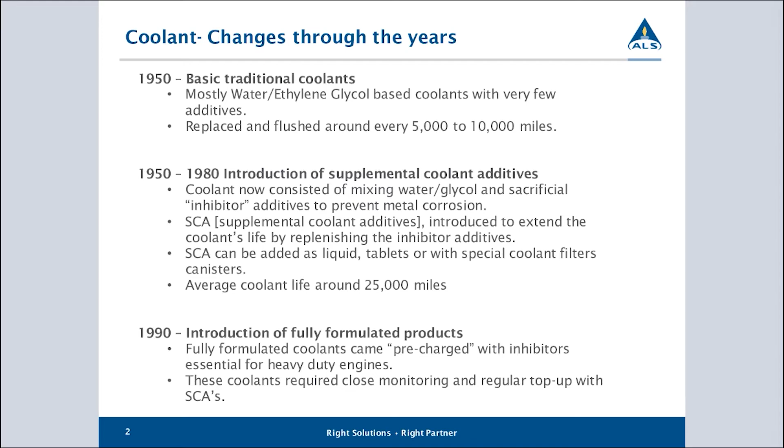Around the mid-90s, we started to see a completely new technology coming into the coolant space, normally referred to as extended or long-life coolants. These were coolants meant to be a fill-for-life type coolant, where instead of needing to be re-additized at intervals, it could essentially be put in the system and left to work continuously, typically for the life of the system.

The principle these coolants worked on is that instead of using a sacrificial additive or inhibitor, they used a barrier technology. Essentially, the additives in these coolants, normally some form of organic acid, would coat on the metal and prevent oxygen from being able to penetrate the layer and come into contact with the surface, and this would then stop corrosion from taking place.

There was a lot of interest in these coolants when they first arrived, because there's a lot of hassle in looking after cooling systems, and this certainly took away a lot of the hassle factor.

However, these coolants didn't seem to work out as well as expected. We found corrosion was still occurring in engines using these coolants, and in some cases you would even have accelerated corrosion, more serious than what we had seen on the conventional coolants.

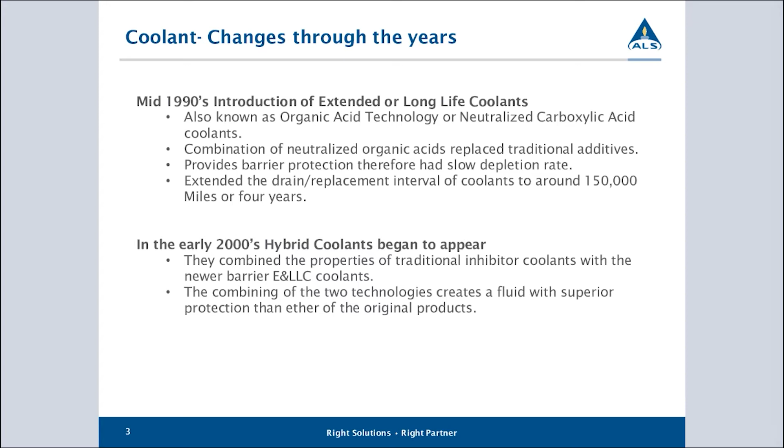All right, moving into a little bit more detail on the coolant formulations.

Coolant generally starts with water. Water is still one of the most popular means of providing coolant, because water is very good at transferring heat. Its ability to absorb heat energy and to move it through a system and dissipate it through a cooler is very effective compared to a lot of other fluids. This is why it is still a very popular coolant type that we see being used in engines and even increasingly with EV vehicles.

The batteries and the charging systems also need to be cooled, and we're seeing the same sort of thing happening where they're using water-based coolants to provide this cooling on those vehicles. So we start with water.

Excuse me a minute, just to keep the throat working. So we start with water, and then we will mix it with glycol.

Historically, ethylene glycol was the main glycol used. Increasingly, we're seeing propylene glycol being used now. Essentially, both of these are to try and provide freeze protection for cold environments in winter, and also some assistance in boil protection to try and raise the boiling point of the fluid.

The general ratio of water to glycol is generally 50-50. Nearly all coolants will be prepared at that dosage rate. We will then add our inhibitor package. So if it's a conventional coolant, we'll be using our sacrificial additives. If it's an organic acid, it will be using the organic acid inhibitors, or a combination of both. Increasingly, we're seeing these hybrid coolants becoming the dominant coolant type that we see being used now.

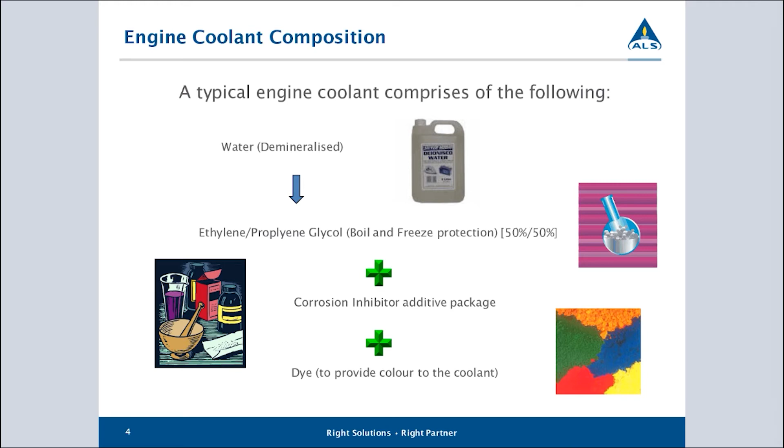And then lastly, we put a dye into the coolant, and this is just purely to give it an identifiable color. There is a range of different colors that coolants can be dyed, but the dye itself doesn't provide any benefit to the coolant. It's just merely a means of being able to give it a specific color so that we can identify it.

Just through convention, there's no real rules about this, but what we tend to see happening is that conventional coolants are generally dyed green, and that's probably the most popular color for a conventional style coolant. They can also be purple, blue, pink. Those are typically the colors that we're seeing conventional coolants being dyed.

The hybrid or long life coolants are typically red, which is a very popular color. Orange is a popular color. Yellow and blue are also popular, more in the European market than in North America.

Something else that can be done with the dye is that there are some coolants where you get a color change that can be triggered by the dosage rate. So you can get a sense of whether or not your additives and your water is in the correct ratio based on the color. There's a color change if there's too much water or not enough water in the coolant.

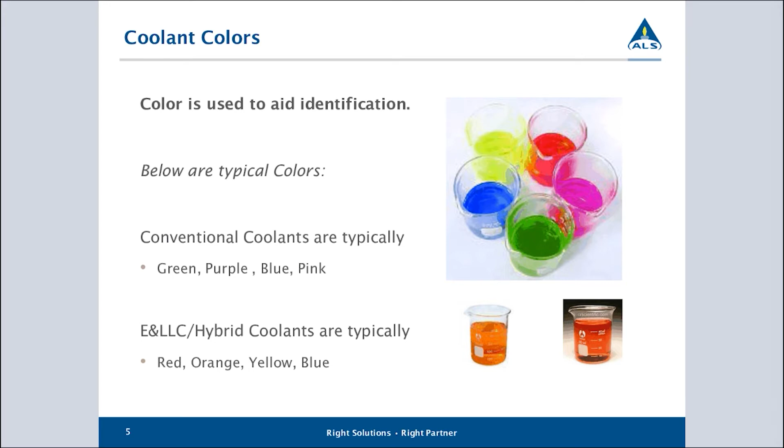Some of the coolants will also contain a phosphorescent dye that makes it easier to identify coolant leaks. So if you've got coolant leaking out of a system, the coolant may boil away, but it'll leave some of the dye behind. And these can be spotted using black light, that type of thing.

Conventional coolants have a wide range of additives that can be present in them, and normally there'll be more than one. Sodium nitrites is probably the most common inhibitor we're seeing in use in conventional coolants. These are very effective at preventing corrosion on iron. But sodium nitrites doesn't work very well with aluminium systems.

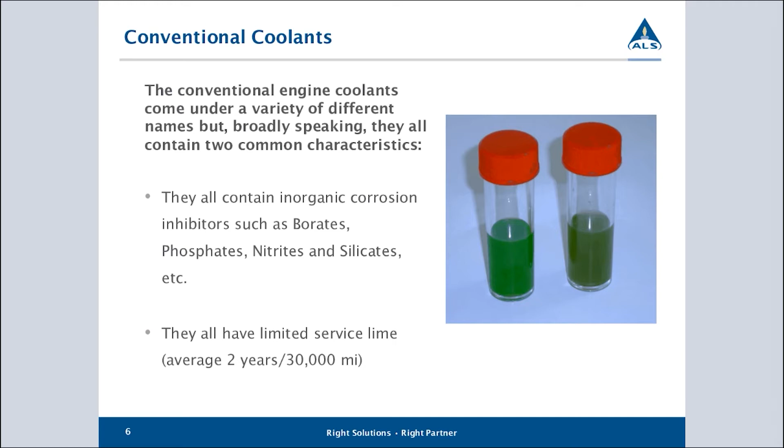So if you have got aluminium, you tend to find silicates is more common in the conventional coolant space. So sodium nitrite, as I said, is the most common, and monitoring nitrite depletion in a coolant is a very essential part of monitoring the life of these coolants and making sure that they still work effectively.

Essentially, what's going on for people unfamiliar with this is that you will dose the coolant with sodium nitrite. When nitrite reacts with oxygen and becomes nitrate, that basically means it's got an extra oxygen added to the molecule, and we're monitoring the conversion. Once it becomes nitrate, it's no longer effective in the system. So by monitoring both compounds, we can see the conversion rate from one to the other.

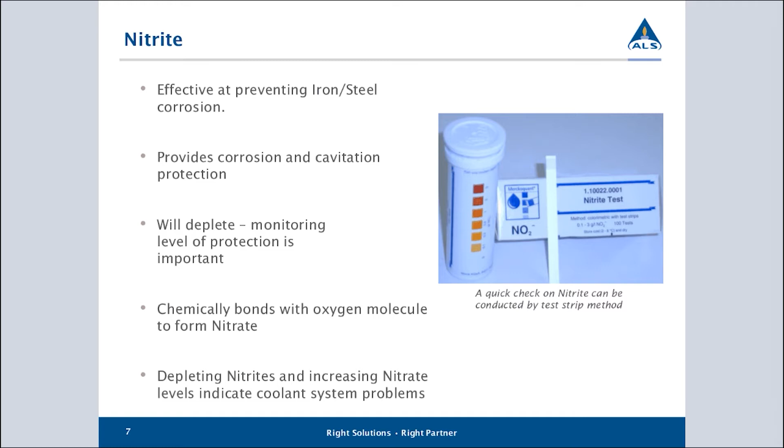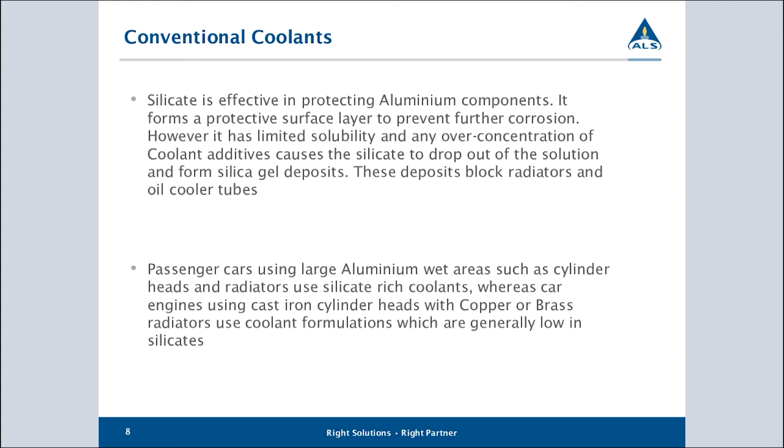If you have an engine that is primarily aluminium rather than cast iron, then sodium nitrite doesn't work very well, and so these tend to use a silicate inhibitor. You tend to find that these have fairly high levels of silicon in the silicates in the coolant to prevent corrosion. There are problems with using silicate-based coolants. I'll get into those in a little bit more detail in the next few slides.

Your extended life or long life coolants will often advertise the fact, or be easily identified by the fact, that they do not contain silicates, phosphates, or borates. The reason they're advertising this is that the presence of these additives can form solids in the coolant.

This is the problem I was referring to earlier when I was saying that people were overdosing the coolant. If you have too much additive present, it will tend to crystallize and form hard deposits. These can be abrasive and they can also block the system, so the formation of these compounds is not desirable in a cooling system. Anybody working with cooling systems for any length of time would have come across a cooling system that's full of a green gungy type of material, and that's the silicates forming or crystallizing within the system.

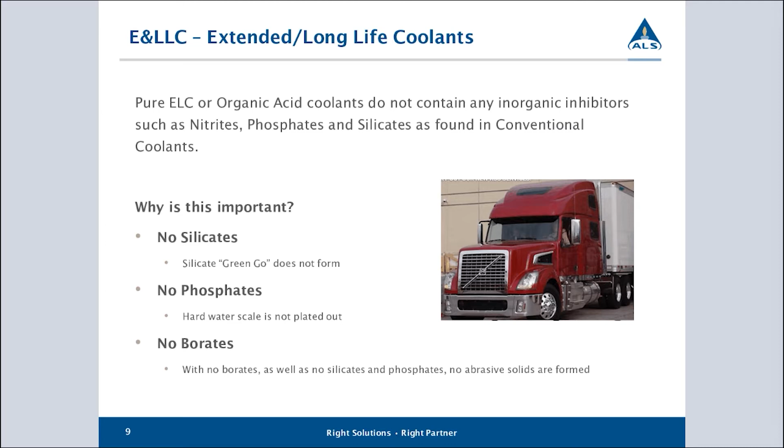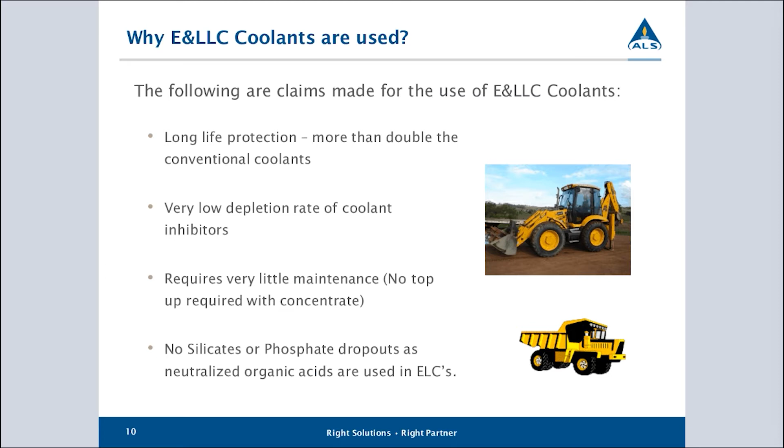So, as I said earlier, the main reason people tend to promote the use of these coolants is the fact that it can be a hassle-free coolant. You put it in, you don't need to worry about it again.

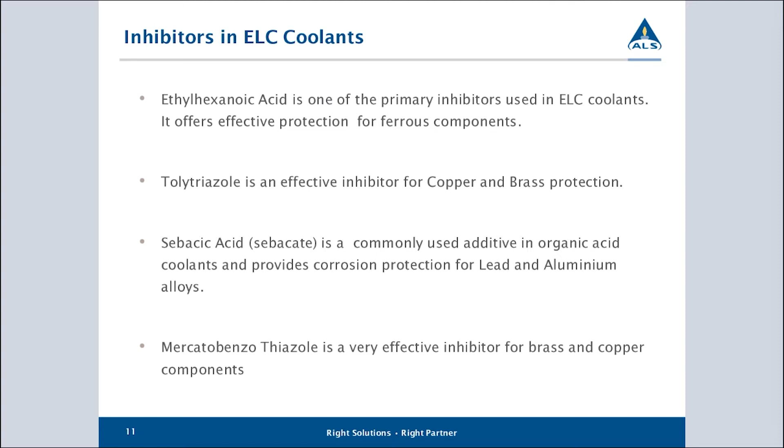Can we mix a coolant? The simple answer to this is no. We really shouldn't mix two different coolants together unless we properly understand what it is that we're dealing with and what the chemistries are that we are working with. So as a general rule, I strongly recommend that we do not mix coolants unless it is an emergency situation, where we have no choice but to keep a system running and have to put in a different coolant. When that occurs, I recommend that at the earliest opportunity we need to drain what is in the cooling system and refill with whatever is the main coolant you would typically use in the system, just to get that mixture out of there.

The problem is that because different coolant manufacturers use quite different chemistries in their coolant, when we start mixing these together, we can get reactions between these additives, and these reactions can be unpredictable unless we properly understand the formulation of each of the coolants. So the general advice is not to mix coolants if at all possible.

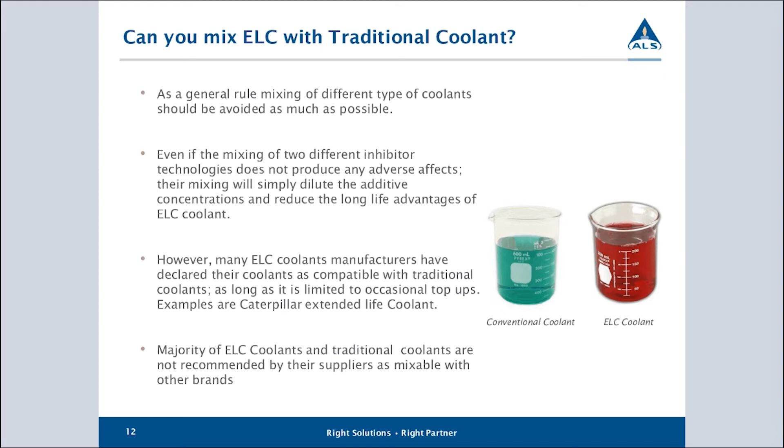The hybrid coolants are literally a mixture of organic acids and one or more of the sacrificial type inhibitor additives, and the most common one you will find in there is sodium nitrite. This is particularly common if the coolant is intended to be used on an engine that's got cast iron cylinder heads and cast iron blocks.

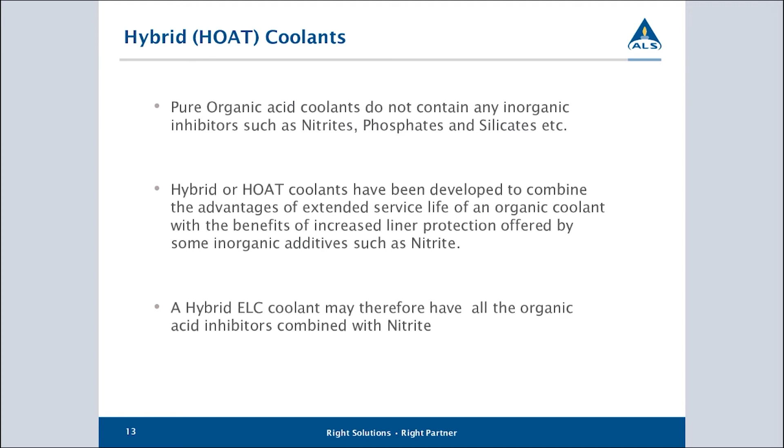There are other inhibitors that will be used if we're dealing principally with aluminium components. Sodium nitrite is not very good at protecting aluminium, particularly at higher concentrations - it can become problematic to the system, which suggests that we need to be careful as to what coolant we're using in what system, to make sure that they are compatible with each other.

Something to bear in mind is that one of the common threads we see occurring with engine technology in particular is the drive to make more power from less. Basically, engines are tending to get smaller, and power is tending to get larger, and this ultimately means that to generate more power, we need more heat. So we've got systems that are getting hotter, producing or capable of producing a lot more heat to produce the power output that we want. And that means the cooling systems are having to deal with higher heat loads, particularly under peak load conditions, than what they may have been dealing with historically.

Sorry, I have to keep taking a sip of water to try and keep the throat working.

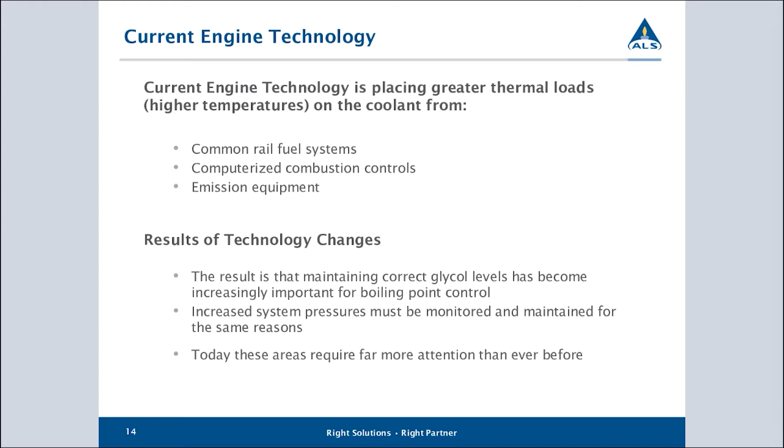A number of research bodies have looked into what causes failures on engines, and most of these conclude that nearly half of engine failures can be attributed back to the coolant. In my personal experience, I've seen it rated even higher than that. Often we'll have an engine that has failed, possibly a bearing failure for example, but when we strip the engine down and examine it, we'll tend to find there was in fact a corrosive problem in the cooling system that allowed coolant to leak into the engine oil, which had ultimately caused the bearing failure. So the origin of the failure was through a poorly maintained cooling system.

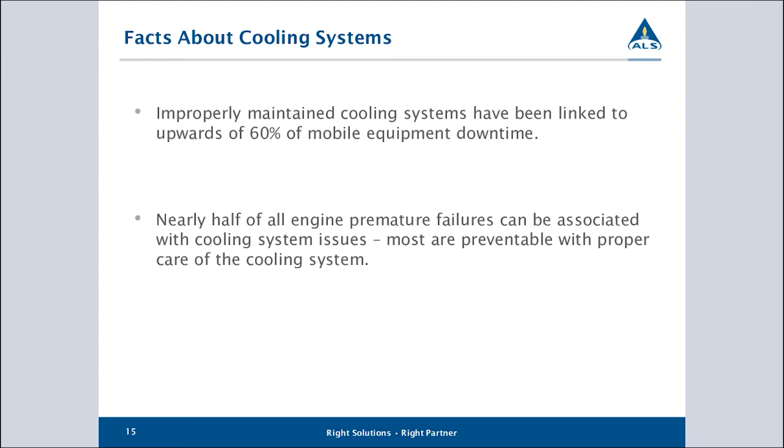Moving on to the testing that we do, there's a range of physical tests that we can do to the coolant to understand its physical condition. In no particular order of importance, we've got pH, reserve alkalinity, glycol content, chloride content, nitrite content, conductivity, and quantifying the organic acids present in the coolant. We can also look for contaminants in the cooling system to see anything that might be getting in there that shouldn't be.

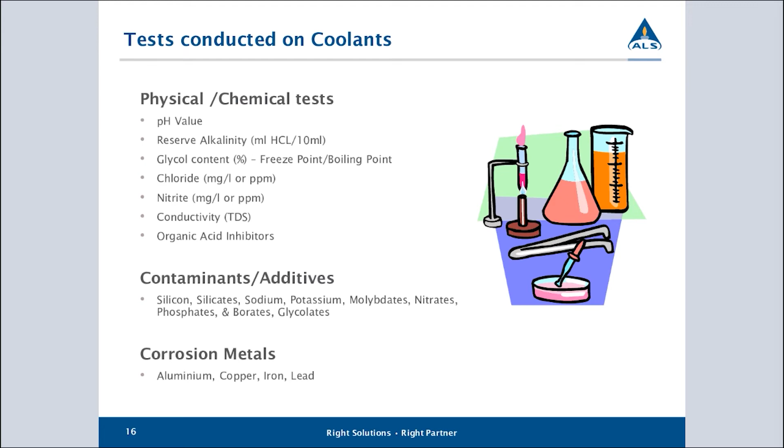And then importantly is to monitor corrosion. If we can monitor the metals present in the system, and if we see those metals starting to dissolve into the coolant, that is a strong indicator that corrosion is occurring within the system.

All right, pH. Water that we start with has a pH of 7. We put additives into this coolant, and generally those additives tend to be more alkaline. So what we see is that the overall pH value of a coolant tends to rise above 7, to somewhere around 8. Most new coolants, when we test the pH, will test somewhere around 8 on the pH scale, and it should be stable.

The most important thing to be aware of with your pH value is that you want it to run somewhere between 7 to 8, possibly as high as 8.5, but you don't want it to go much higher than that, and certainly not much lower. It should also remain very stable. If you keep checking the pH over an extended time frame, whatever its original value was, that's what you want it to stay at. If you see changes in pH, it's indicative of something happening to the system—that could be contamination or degradation of the coolant, or a combination of those things. As soon as we see shifts in the pH value, that's a very early warning indicator that this coolant is not working very well in this environment.

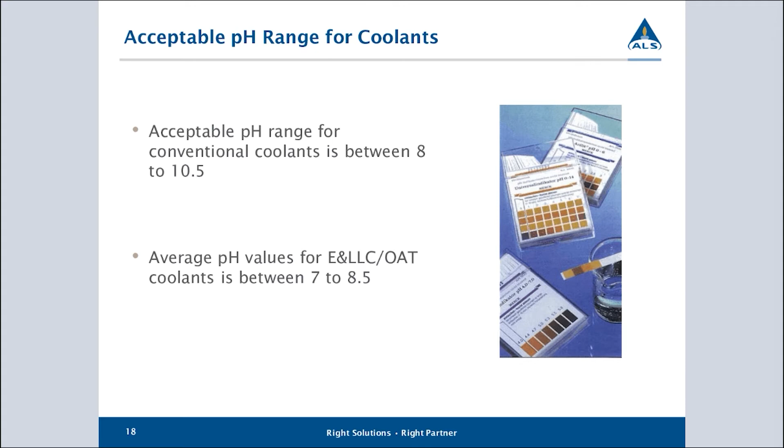For our conventional coolants, the older style coolants, somewhere between 8 to 10 would be a typical range. You very seldom see them as high as 10 nowadays—all the newer formulations tend to run between 8 to 9 maximum, and it's unusual to see a coolant go up to 10 now. For your longer life or hybrid coolants, generally they're running between 7 to 8.5, more typically around 8 would be a typical value. Ideally, whatever its starting value is, it should remain at that value. We don't want to see changes in the coolant over time.

A very common measure done on cooling systems is to quantify the sodium nitrites, because this is your principal inhibitor additive used in most coolants. Any heavy-duty coolant will invariably have sodium nitrite as part of its chemistry. It's just very effective at preventing corrosion of cast iron or steel components in the cooling system.

As this additive gets consumed, we will see a drop-off in the nitrite value, and if you're monitoring the nitrites, you'll see this change in quantification. So it's really good to see how the inhibitor is being used. If you see a rapid depletion, it means something is trying to drive a lot of corrosion in your cooling system, and this means two things: you may have a problem with the cooling system running too hot or overstressed, or it could mean that whatever else is in that coolant that should be inhibiting corrosion is not working. If this is a hybrid style coolant, it means the organic acids are not doing their job. This could be through cavitation, excessive vibration, or electrical current. There's a range of things that can cause this, but it's an early warning indicator that this coolant is not surviving very well in that environment.

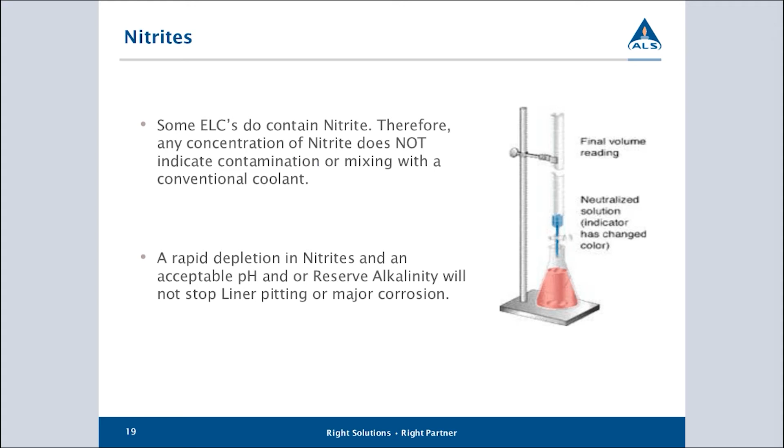We measure the organic acids principally by using ion chromatography or ultra-high pressure liquid chromatography. These are complex instruments—laboratory-grade equipment. It's not something easily used in the field environment, but it can quantify, and particularly important for coolant monitoring, it can quantify the organic acids for us. This enables us to see things like, is there a mixture of coolants being put into use? Are these additives being removed from the coolant? This would indicate that there's some sort of stress going on in the coolant. So it gives us a snapshot into that aspect of the physical property of the coolants.

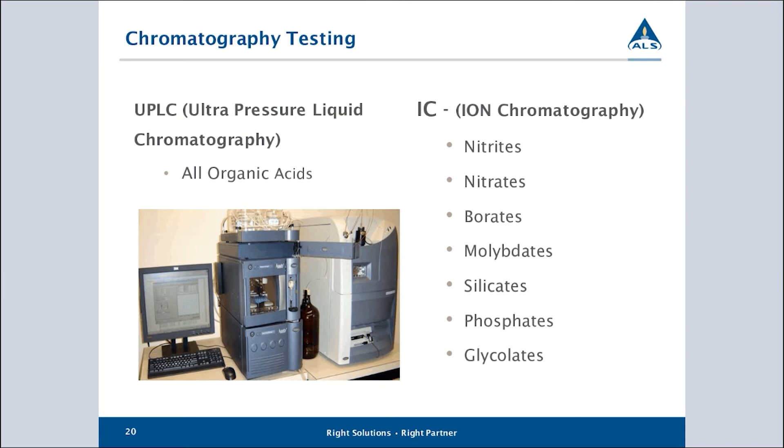We do an elemental analysis mainly for the metals, and we can also look at some of the additive chemistry directly. The main elements we're monitoring are things like aluminium, iron, copper, and lead. These are the metals most commonly found in cooling systems. If we see an increase in any of these elements, it's an indication that corrosion is taking place in the system. So even if all the other properties look good on the coolant, if these are increasing, we have corrosion—there is something causing corrosion within our cooling system.

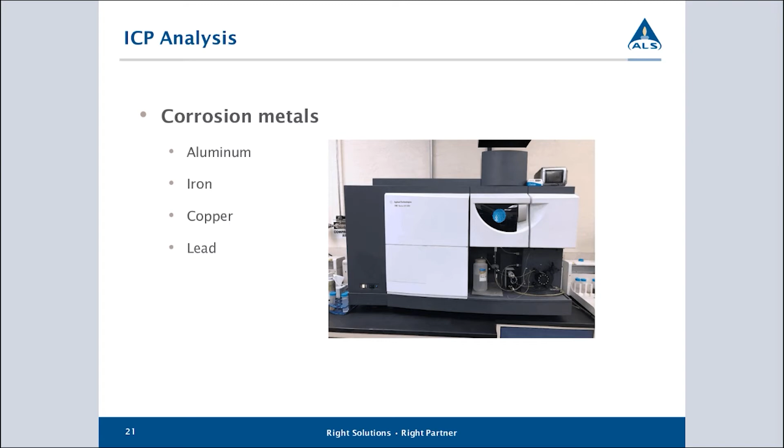Reserve alkalinity is a measure of the coolant's ability to absorb acid. Coolants don't normally get exposed to much acid from the environment, that type of thing. But there is one potential problem with the coolant, and that is your glycol: when it degrades, glycol can thermally decompose, and it will start doing this as low as sort of 80 degrees Celsius. When this thermal degradation occurs with glycol, it does tend to produce acid components.

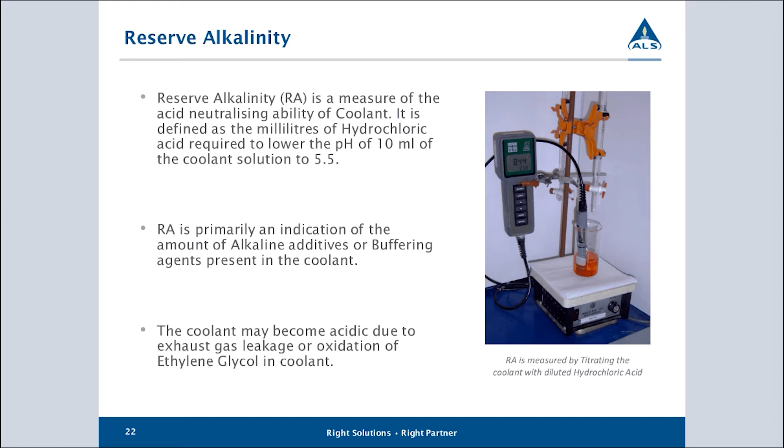So with some coolants, we know that we're going to see thermal degradation of the glycol. We know that acid is going to be formed, so we need to buffer the coolant to absorb that acid, to prevent it causing any sort of acid corrosion in the system. The reserve alkalinity is a means of measuring that buffering potential. And how much buffering the coolant can take depends very much on the chemistry that the formulators put into it.

So we do see a range of potential values that could be reported. Conventional coolants generally have higher RA than the newer hybrid or long life coolants, but essentially what you see on screen, 8 mils to 20 mils would be typical for an older style conventional coolant. 2.5 to 5 mils will be what you would see for the newer style coolants.

In of themselves, it's just telling us what the coolant's ability is to absorb acid. It doesn't necessarily tell us the coolant's ability to stop corrosion. So you may still have very acceptable reserve alkalinity of a coolant, but if the inhibitor additive, say sodium nitrite, has been consumed, corrosion will still happen. The RA itself will not inhibit corrosion in the system.

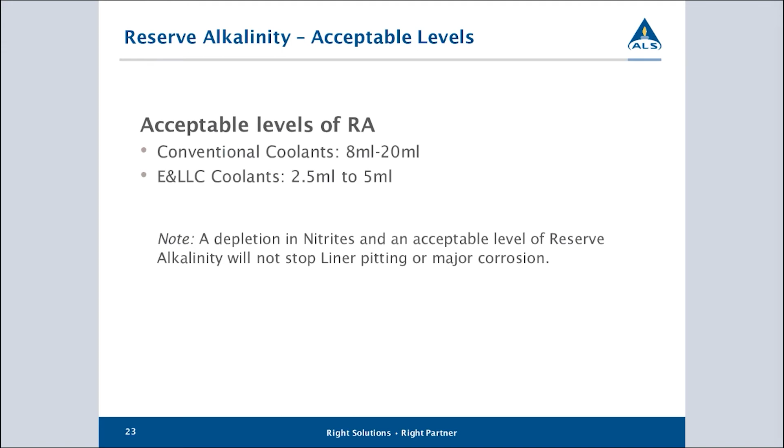Conductivity is something that's fairly quick and easy to measure on the coolant. And the reason we measure it is that the chemistry in the coolant is going to provide a certain level of conductivity in the coolant. Generally, pure demineralized water is a very poor conductor—electricity just simply won't flow through it easily. As we start adding things to the water, the conductance increases.

So the first thing we need to establish is, all right, we've got a new coolant—what is the typical conductivity of this coolant? Then we look for changes. And if we see changes, generally increasing conductivity in the coolant, that could be through contamination of the system. A very common cause of this is contaminated water being added to the system. So if somebody's just drawing tap water and adding it to the system, that will definitely drive up the conductivity. That's a very quick way of identifying that particular problem occurring in the coolant.

It can also change as chemistry changes. So again, it's another easy way to tell that some sort of chemistry in the coolant is changing, and this could be a precursor to bigger problems in the cooling system.

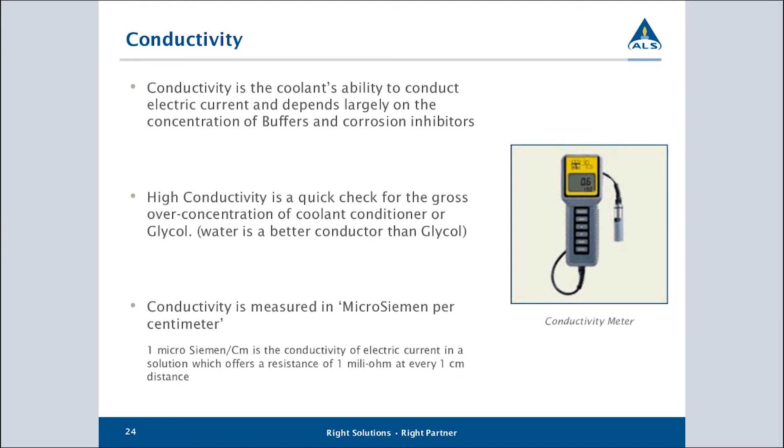Total dissolved solids is a measure of how much solid content is being carried around by the coolant. The principal way to do this is to filter out the solid particles and then weigh how much solid material is filtered from the coolant. You can also do it by using what they call a TDS meter—a version of a conductivity meter that measures conductivity and then converts it to a total dissolved solid content number.

Be aware that this number doesn't correlate very well to an actual filtration methodology, and that's just inherent within the formulation of the coolant—it does tend to interfere with the measurement. But at least if you trend it, you can get a sense of if this is going up or down. Obviously, having solids in your coolant is not desirable. It'll wear moving components like your water pump, and it can also start to block narrow tubes and pathways, etc.

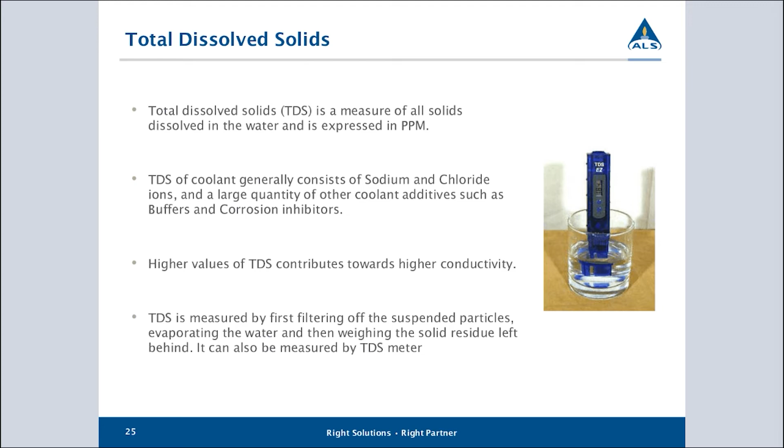Measure of hardness is basically just measuring your calcium carbonates or other carbonates in the water. These are found if people are using tap water or drinking water, you'll tend to have these present. They're important for human health, you don't want to drink water that doesn't have these, but they're not beneficial to a cooling system and can lead to deposits. That's our main concern with calcium carbonate or any of the other carbonates, is that it will deposit in the system.

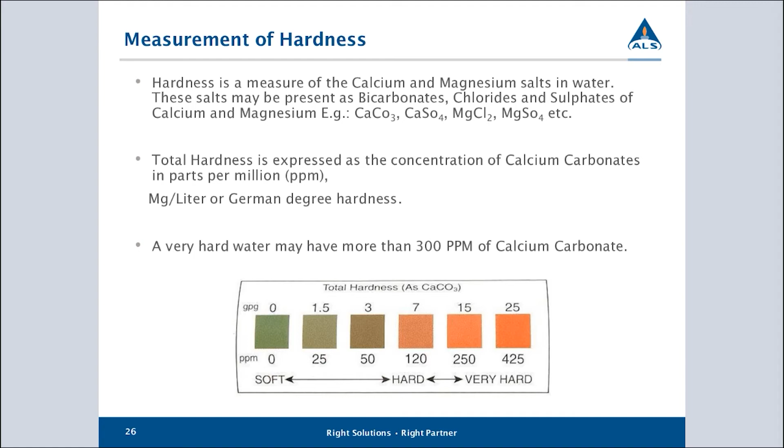But unfortunately, when they're in the cooling system, they will tend to be deposited out, and there's two problems. First, it's reducing the flow because it's taking up space. Second, it's also very good at insulating and doesn't allow easy heat transfer through the surface, so it inhibits the ability for heat to be managed in that system.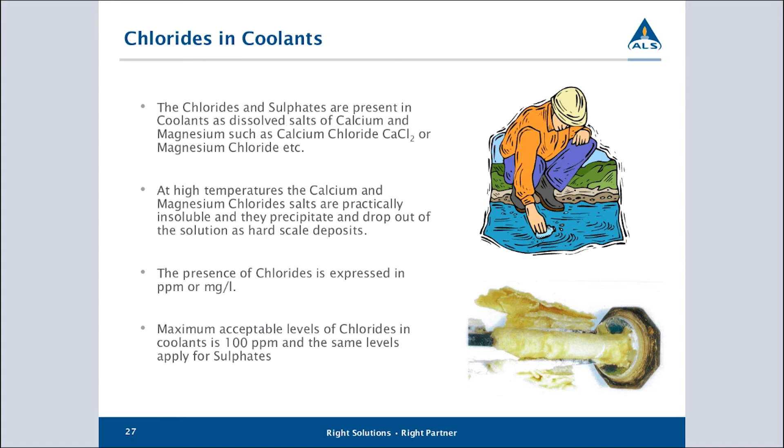Different engines and engine manufacturers have different levels of what they believe is acceptable for this, so we've got a couple on screen there. Some engines are more sensitive to it than others, so it depends on the design of the cooling system and radiator system as to how much it can tolerate. But as a general rule, you want to reduce your hardness as much as possible and have as little dissolved solids content in your coolant as possible, which means we have to use high purity water when making up or topping up a coolant system.

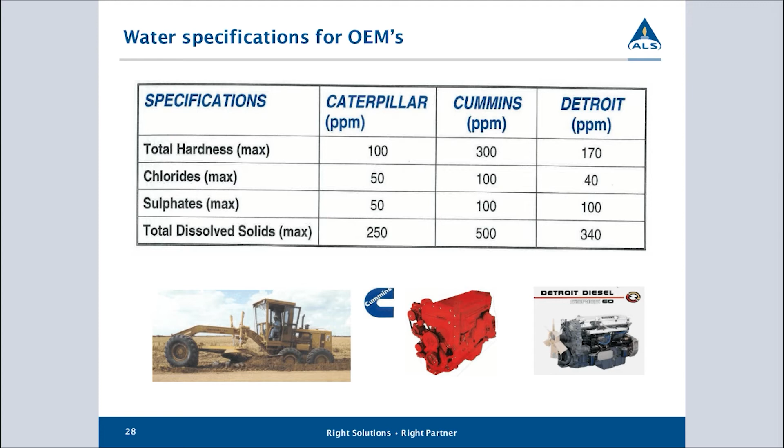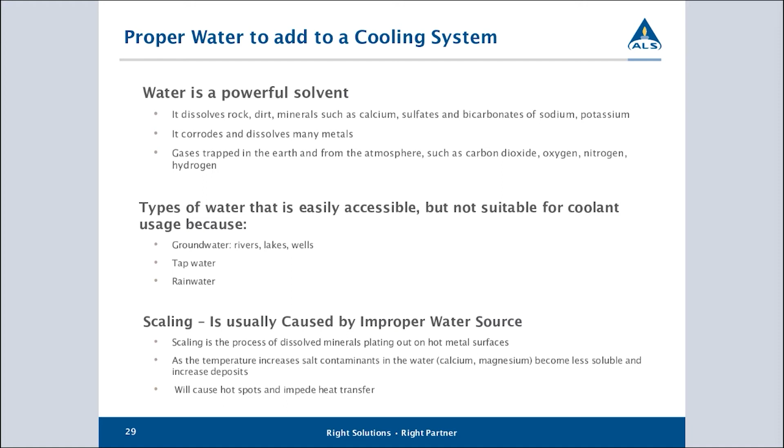Water is very good at dissolving this material, and if we're just using even rain runoff water, it may contain some of this. So we just need to be careful as to where we're sourcing water from to go into coolant systems.

Antifreeze or glycol is added. In principle, and originally, glycol was added to cooling systems to prevent freezing. Anybody living particularly in the northern hemisphere will be familiar with how cold winters can get and the fact that water will freeze at typical overnight winter temperatures. So we needed a means to prevent this water from freezing, and glycol was just a very simple, easy methodology to do this. There are two main glycols in use.

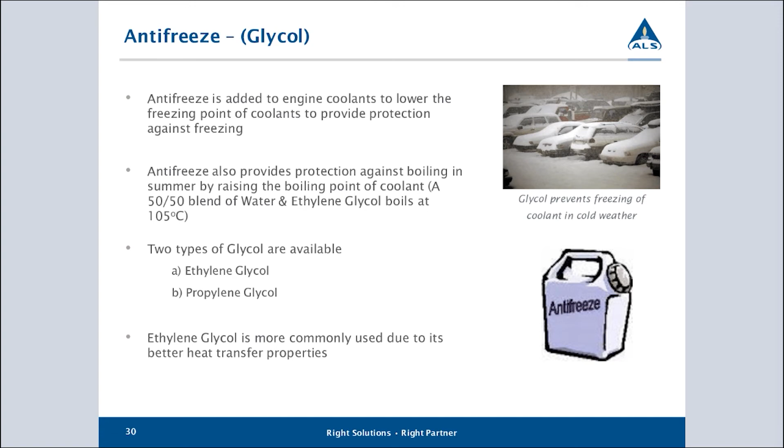Ethylene glycol has been used for a long time. Propylene glycol is becoming more popular now. The main reason for the switch is propylene glycol is less hazardous than ethylene glycol, so it's all about toxicity that's the concern. They both work in a very similar way within the system.

Glycol can degrade, and this is a natural process, and is one of the things that will limit the life of a coolant, in that your glycol will tend to thermally degrade over time within the system. The hotter the system, the more quickly it will degrade. So if we see glycol falling away rapidly, that would tend to suggest the coolant has been subjected to higher temperatures than what is ideal.

Essentially, when it's breaking down, one of the degradation products is ammonia, and if you smell ammonia coming off your cooling system, it's a very strong indicator that this degradation is happening. Other things we'll see from an analysis side is that the glycol content is dropping away. One of the products is water, so you don't necessarily get an overall loss to the cooling system, the glycol is converting itself to water in the system. So it seems kind of magical sometimes that you just slowly see glycol disappearing but don't seem to lose anything out of the cooling system. The other thing we'll see is that the pH value will drop because the compounds being formed as the glycol degrades are acidic.

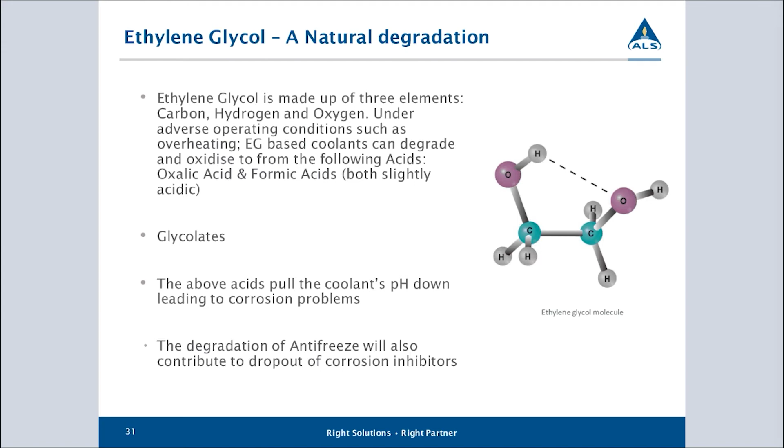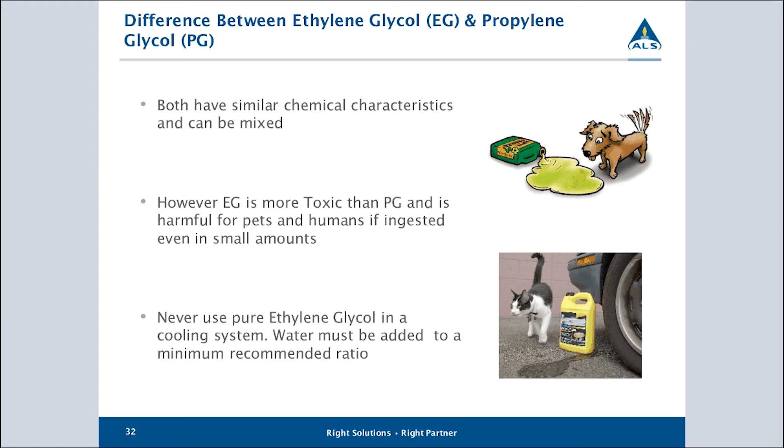This slide is a little bit about the difference between ethylene and propylene, and the fact that propylene is considered less harmful as a toxin, which is why there's this drive to start using it. However, I would caution that coolants, particularly because of the inhibitors and everything else in them, should generally be considered as hazardous or toxic material. I certainly wouldn't recommend just draining it into a waterway or something. It should always be treated as potentially harmful material, kept containerized and marked clearly, and not allow pets and things to drink it.

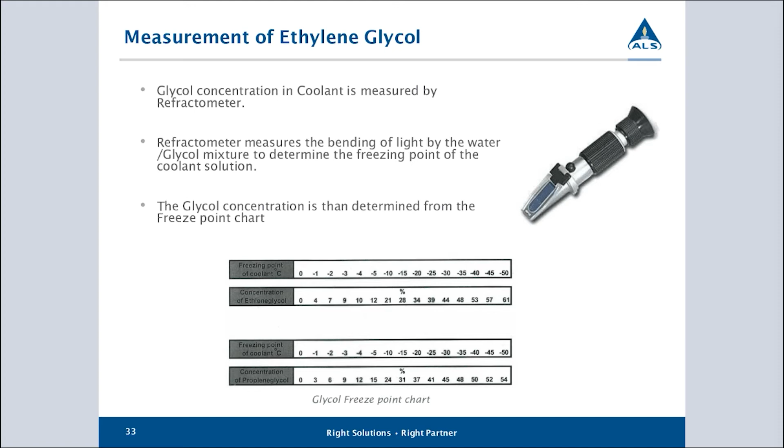Measuring glycol is most commonly done by measuring the refractive index of the coolant. As we add glycol to water, it changes its refractive index, and by measuring the refractive index you can then calculate how much glycol is present in the fluid. It's the most common way it's done. You can get little handheld devices like shown on screen, and these can easily be used in a workshop environment for checking coolant to make sure the concentration is correct.

Why we don't just use pure glycol instead of water is because glycol is not as effective at removing heat from the system as water is. So a mixture of glycol and water isn't as good as water, but it's not as bad as glycol, and so we get to a compromise position that we can run with.

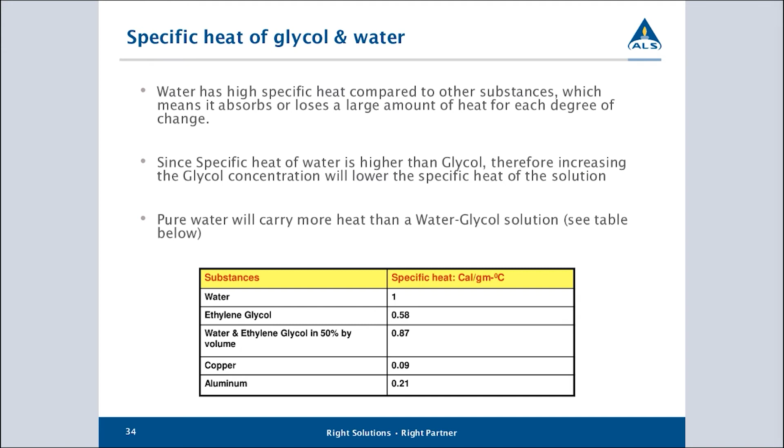This is why this is the most common ratio you'll find in water-glycol mixtures. A little bit more detail on the freeze point.

But once we get much above 60%, we see an inversion. Basically what's happening is the whole chemistry has changed—we've now got water and glycol rather than glycol and water, and that changes the behavior of this compound. We actually see an increase in the freeze point again. So once we reach about 60%, there's no real value in adding more glycol to try and lower the freeze point. You're not getting much benefit anymore, and you can actually start going the wrong way.

At 50-50, we generally get down to minus 35 Celsius as our freeze point, which should work for most applications. If you need to go below that, speak to whoever you source your coolants from and discuss what can be formulated to work at lower temperatures. This shouldn't be taken on lightly—you'd need to do research to establish what will actually work if you're going down to much below, say, minus 50.

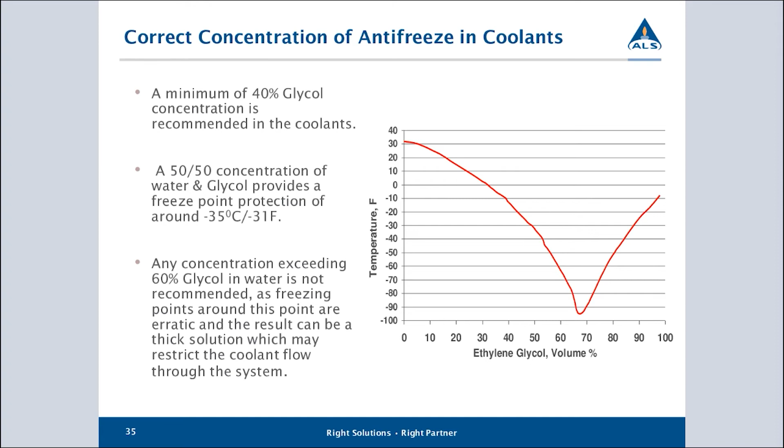How to take a coolant sample. One thing to be careful of with coolant is that it's hot, and it's under pressure. So the main method for taking a sample should be through a dedicated sampling point or valve on the system that allows you to bleed off some coolant in a controlled manner. There are a number of different types of valves on the market or installed on equipment for this purpose.

Some valves use a screw-on fitting, some use a push-on fitting. The methodology for taking the sample depends on the type of sampling valve installed, but please follow the instructions on how to do this. It's a potentially risky activity simply because of the heat the coolant can be at when taking the sample.

If the system does not have a sampling valve and you're sampling a cooling system regularly, I'd suggest installing one. But if you don't have a valve, to take a sample we need to depressurize the system. The system is pressurized thermally—the heat is what causes it to build up pressure. So to depressurize it, we need it to cool down. You'll have to shut the system down, allow it to cool, and once it's come down close to ambient temperature, we can start to open up the system to take a sample. We need to be careful, as there's often some residual pressure in the system even after it's cooled down.

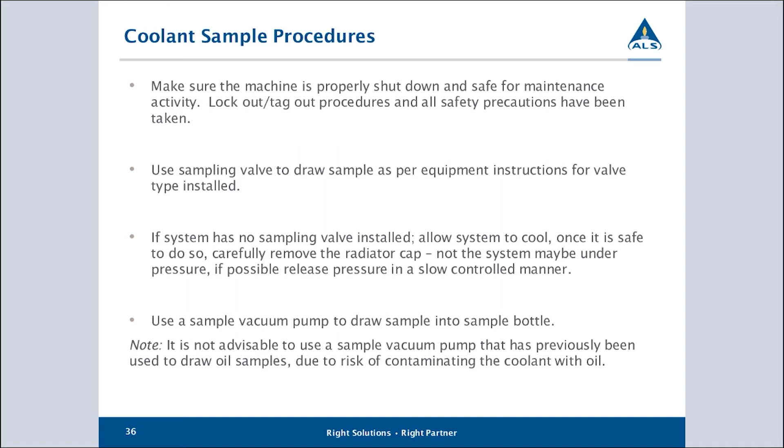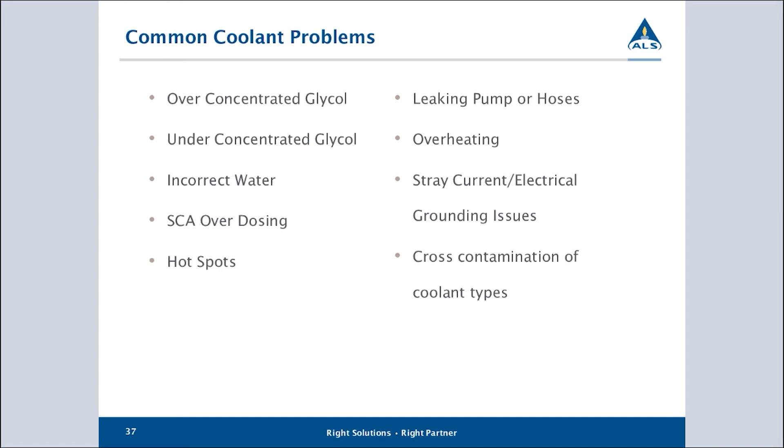All right, what tends to go wrong with cooling systems? Basically having the incorrect glycol content, inhibitor concentrations, using the wrong water, and then general problems with the coolant system itself, where the coolant system may not be working effectively because of a particular problem with the cooling system.

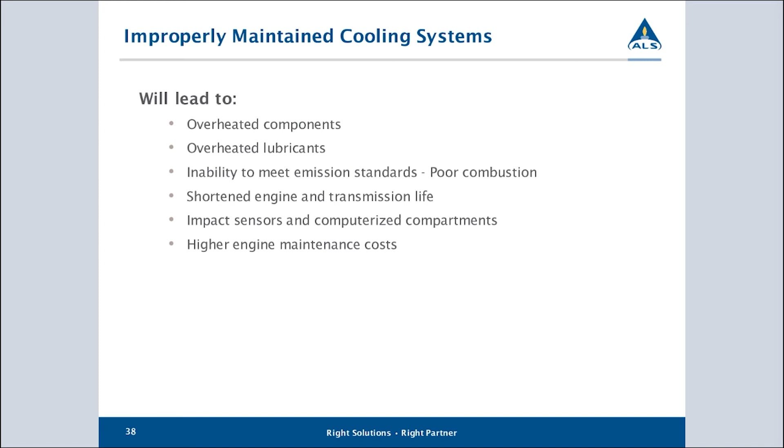If we don't maintain our cooling system, there's a whole range of problems that can occur from this, and the main issue is that we increase the risk of a catastrophic failure of this piece of equipment. Incorrect coolant temperatures tend to lead to seizure of components and physical damage of components, which can lead to complete failure of the piece of equipment. So we really want to make sure that our coolant systems are managed effectively and are in a healthy condition.

All right, things that cause coolant to degrade. A very common problem is that the coolant becomes contaminated, and the most common contaminant is just plain tap water. People topping off a cooling system with water drawn from a drinking tap introduces chlorides and that type of thing into the system, which then begin to plate out. It will also dilute down the additives that are in the coolant as well. As the more water we add, you lead to a coolant that is no longer additized sufficiently for the application.

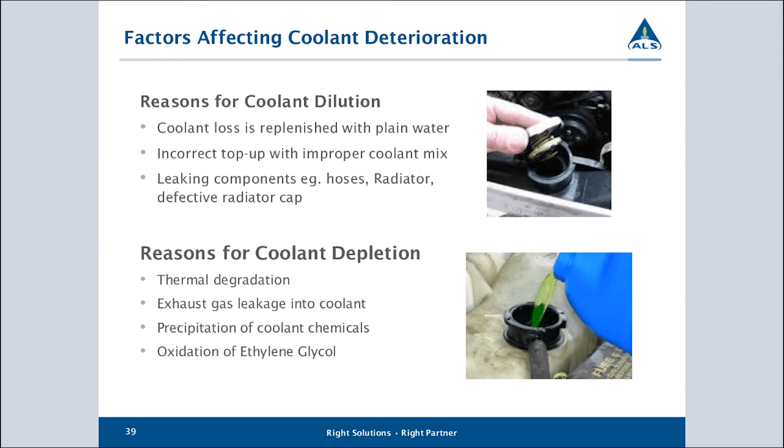Cavitation and pitting of liners is a particular problem that we see on some engines, but basically what we've got is air bubbles forming against the side of the liner, and there's one of two mechanisms that produce these. Some of it is because of air being pulled in and moved around the system just from the way the coolant circulates, and basically what you have is a water-air mix being shot against the liner, with these air bubbles hitting the liner. Another more common problem, though, is vibration. The firing of the cylinder generates a shock wave through the liner, and that shock wave then can generate bubbles off the surface of the liner and bubble them away. This is fairly common on some engines as a particular problem.

Now, when this cavitation occurs, this bubble tends to break away barrier protection. So your organic acid style coolants are particularly susceptible to this issue, and you will tend to find a lot of pitting at the top end of the liner occurring because of this. And once we form a pit, you tend to have an area where the chemistry to form corrosion becomes ideal. So we tend to form more corrosion inside the pit, and the pit steadily gets bigger and deeper and actually can start to channel into the surface.

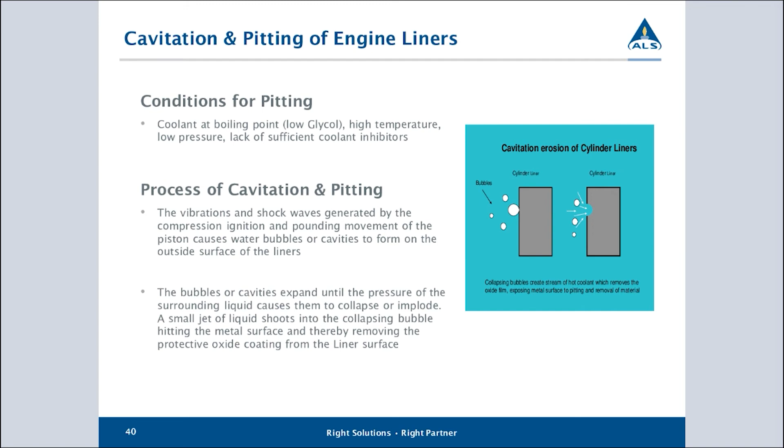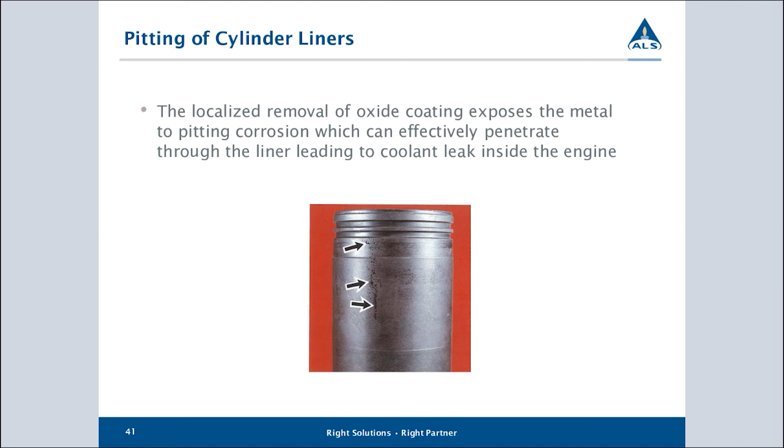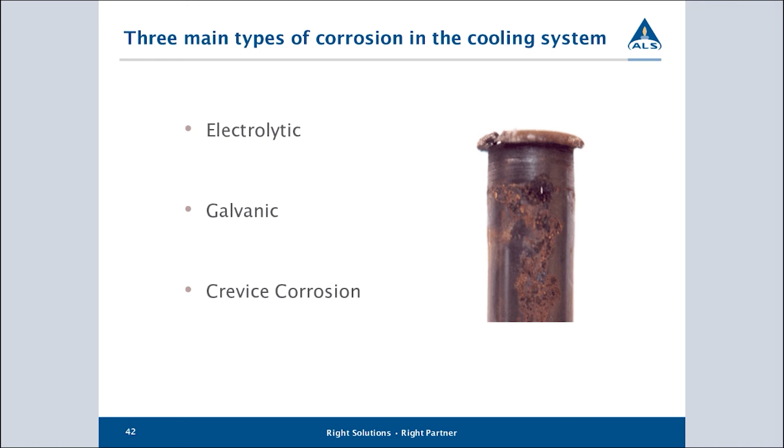There's three types of corrosion that tend to be generated inside a system: electrolytic, galvanic, and crevice corrosion. What type of corrosion is occurring just depends on what's going wrong with the cooling system or with the system as a whole.

Your electrolytic corrosion is generally driven by stray current. We have electrical systems that are attached and bolted onto our engines. If that electrical system is not earthing correctly or has some sort of electrical leak, that will allow electrolysis to be driven inside our cooling system, and depending on the nature, it can be potentially serious. Your electrical connections and grounding are important to try and prevent this type of corrosion from occurring.

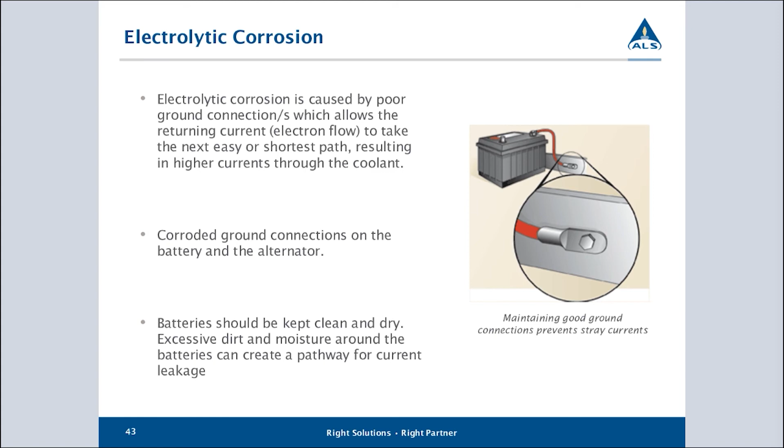One of the side effects of having stray current in the coolant is that it will degrade the glycol, and this is where your ammonia becomes pretty noticeable. If you get a strong ammonia smell coming from the coolant, particularly when you open up the system to check levels and top it up, this is one of the common causes. Either the coolant is being heat stressed, or you've got stray current being driven through the coolant causing this process. From testing, we tend to notice a drop or a rapid drop in the glycol content of the coolant.

Your galvanic corrosion is generally a design problem. If the system is designed properly, this shouldn't be an issue, but it's essentially where you've got dissimilar metals bolted together. You can get electrical potential driven between them, and this can drive a corrosive action through the flow of electricity from simply bolting these two bits of metal together.

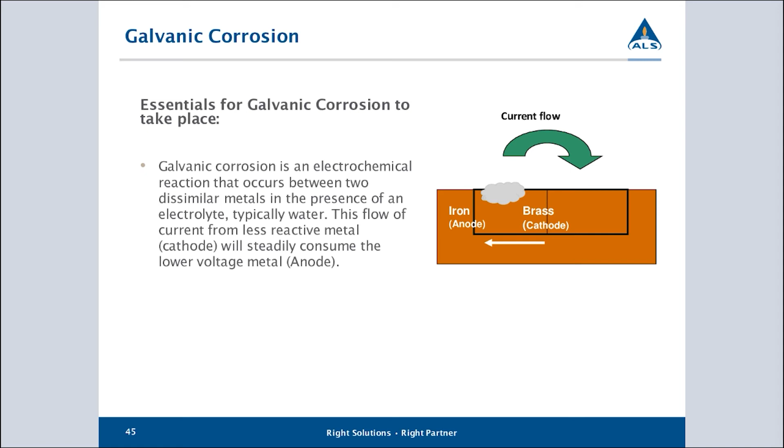To be honest, in most installations this is not a big problem, but where you've got custom-built equipment, this could be an issue. In the marine world, this is particularly problematic because there might be salt water in part of the system, and salt water is particularly good at driving this kind of corrosion.

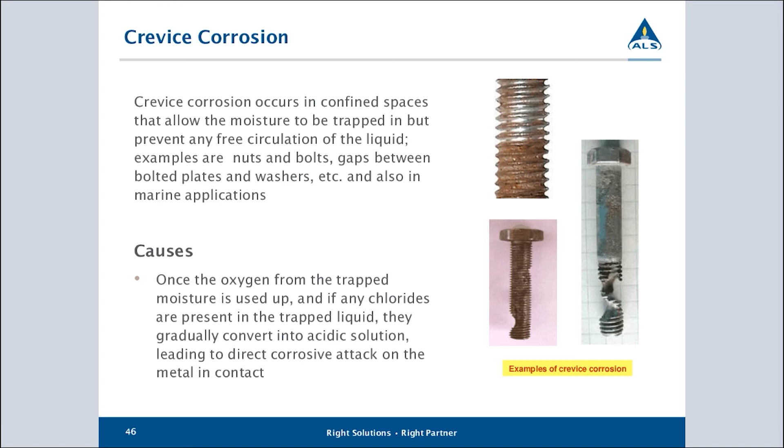But it can potentially happen in a cooling system if we've got a blocked area where we've got a small content of water or fluid trapped, and then this crevice corrosion type action can start up and eat through something. It can eat through pretty quickly, so it doesn't take very long for this to punch a hole in something.

Obviously, forming this is not good in our system. It will damage the tubes, so the copper becomes weaker as a result of this reaction. This material can also become abrasive and inhibit water flow by blocking up tubes and that type of thing in the system.

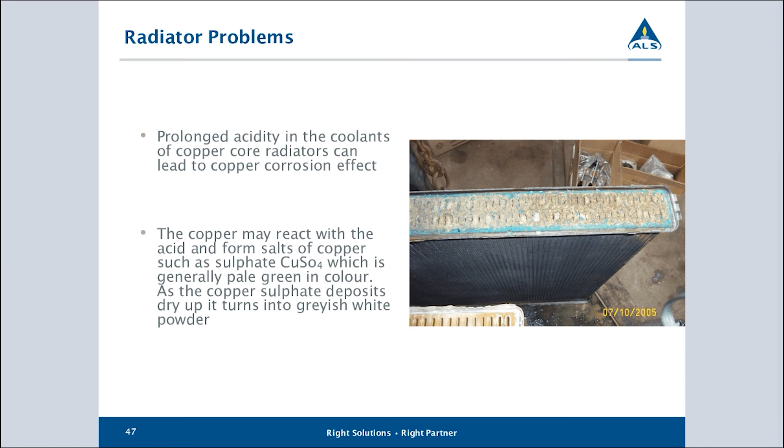This is a more common problem—what we're looking at here is salts that have been plated out. These salts could be coming from dirty water, or from a mixture of coolants that have been put together where particular silicates react and plate out, forming these kinds of deposits in the cooling system. The main way to stop this from happening is to make sure you've got the right formulation of your coolant and that you don't use tap water, only demineralized water, if you top the system up.

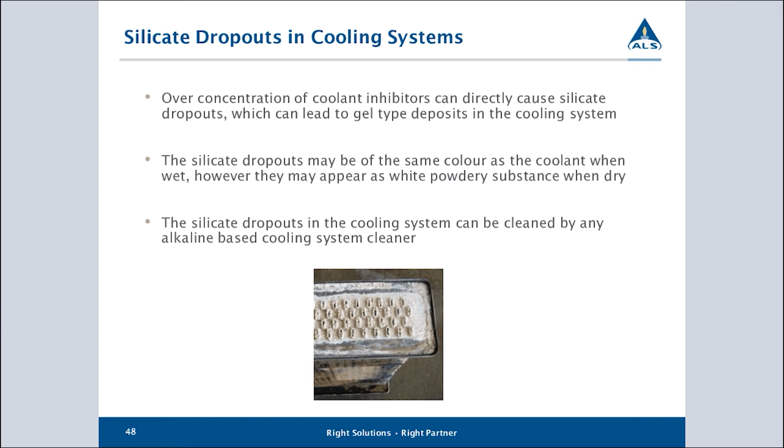Again, this is an example of what tends to happen in the pipework—to get the level we're seeing in this picture, we would need something like almost river water being used in the system as opposed to tap water. But where you've got a high degree of dissolved salts in the water, it will plate this material out inside the cooling system.

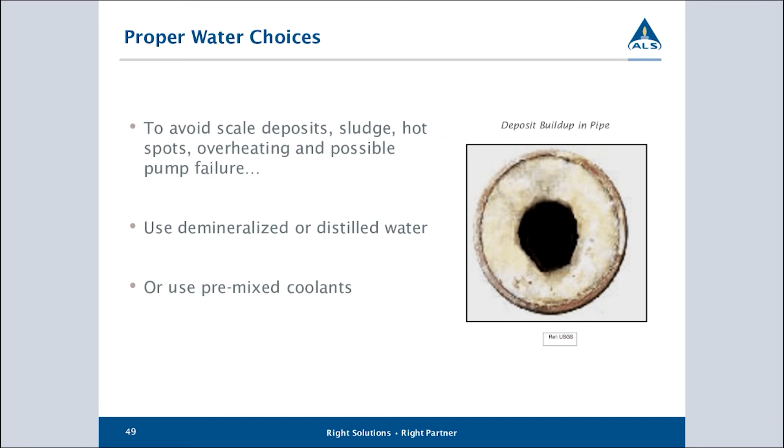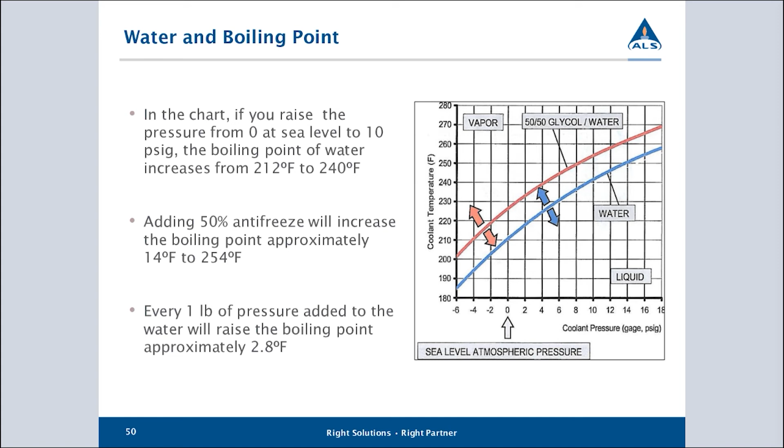Boiling point is increased by pressure, and we don't increase the pressure very much in a system, but the more pressure that we have, the hotter we can make the coolant without it boiling. Obviously we don't want the coolant to boil because it becomes very ineffective at moving heat once it starts boiling. So most cooling systems are under pressure to try and raise the boiling point to some degree.

All right, now it's time to go through a few reports and just show numbers on the screen and kind of what they're telling us.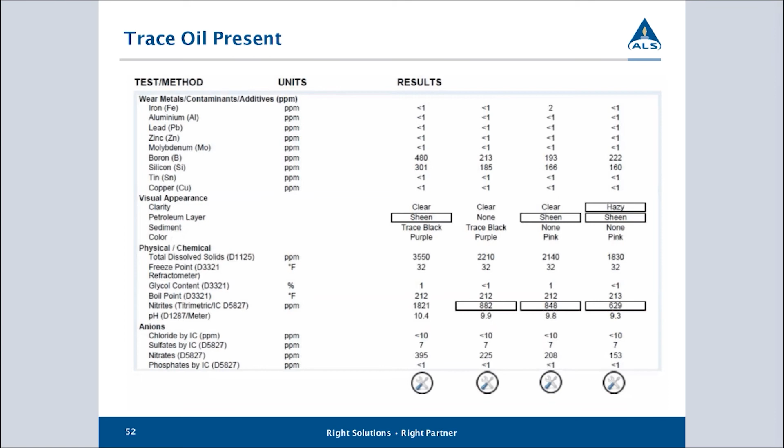Of course, the other thing we've got to look at is, did this happen when they took the sample? As I was referring to earlier, if they used one of those sample vacuum pumps that was previously used for an oil sample, this could be contamination of the sample and not necessarily a problem with the coolant system itself.

Here we have a coolant that has become very hazy. Coolants become hazy when we have an overconcentration of additive and the additive begins to crystallize. If we look at our sodium nitrite results, we've had extremely high levels here, running at nearly 5,000. This is more than likely what has caused the problem - this coolant has been overdosed. This has allowed the additives to begin to crystallize and form solids in the cooling system, leading to this particular situation.

When you see this, my recommendation is we need to drain and try to flush the system. So we want to drain the coolant, fill it up with clean water, run it for a few minutes to try and pick up any dissolved salts and resolubilize them back into the water, then drain that water and refill with proper coolant again to see if we can clear this material out.

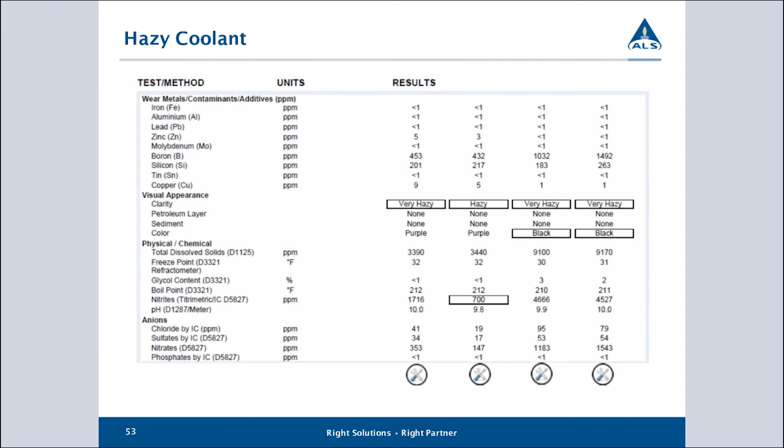And here we have an example where we're seeing corrosion starting to happen. We can see iron has now risen to 12 ppm in the sample, which would suggest we're starting to see the start of active corrosion in the system. What's also concerning is we're seeing a moderate deposit of brown particles - these are almost certainly iron flakes, basically rust that's been carried around in the coolant. The most likely scenario is that our inhibitor level is too low. This looks like a conventional coolant, not a hybrid coolant - just a straight conventional coolant.

And we need higher levels of additives to try and stop corrosion in the system. So what we should be doing here is, because we're seeing active corrosion, we need to flush this material out and then refill with a new coolant, then monitor it closely to see if the corrosion is dropping off or accelerating. If it's accelerating, we might want to dig further and see if we have high temperatures or something driving the corrosion we're seeing in this particular sample.

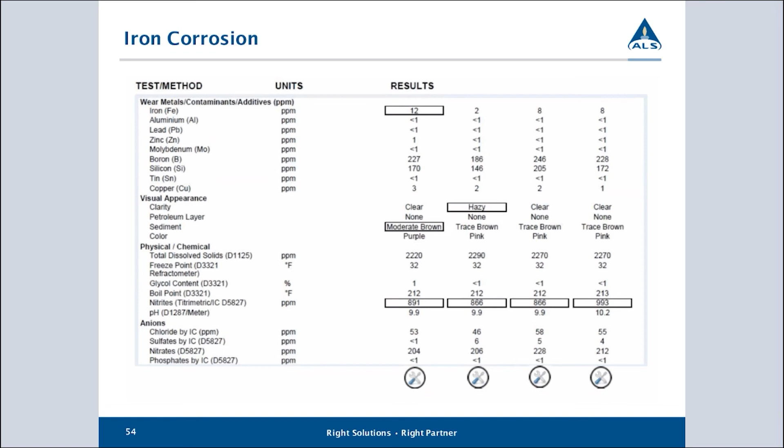All right, here we've got more serious corrosion going on. We're seeing much higher levels of iron. We're noticing that the sample is now being described as very hazy, almost opaque. There's also a lot of brown deposits, and the coolant itself has turned brown from this. There generally isn't a brown coolant on the market, so this would suggest that this coolant is just carrying lots of rust around, which has discolored it.

Again, our nitrite levels are very low, and it looks like a conventional coolant. So in this situation, we really do need to flush this thoroughly now to try and get as much of this corrosive material out as possible. We probably want to fill it with a new coolant, run it for a short period, and probably drain it again and refill to try and see if we can get this one to come back to normal.

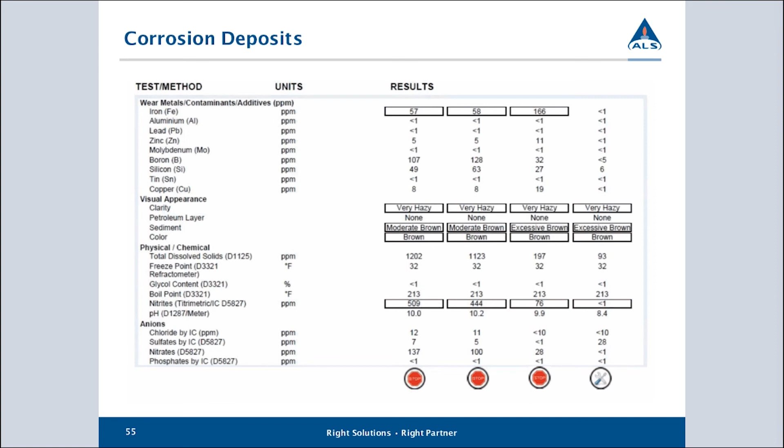All right, here we have a coolant that is driving a lot of copper corrosion. So iron isn't corroding, but copper is. Now, I can also see that our additive levels suggest that this is a conventional coolant, and it is extremely heavily dosed with sodium nitrites, and a lot of this is converted, which suggests this coolant has been in use for a long time.

What I suspect has happened here is that the additive that is inhibiting copper corrosion has stopped working some time ago, and this is leading to the rapid increase in copper corrosion we see going on here. Again, the recommended action at this stage would be to flush the system completely and refill the coolant, and also make sure what formulation of coolant we are actually using here. This additive level just doesn't look typical for a coolant system, so we've probably got either mixtures going on here or something that has been heavily overdosed but not correct for the application this coolant is being used in.

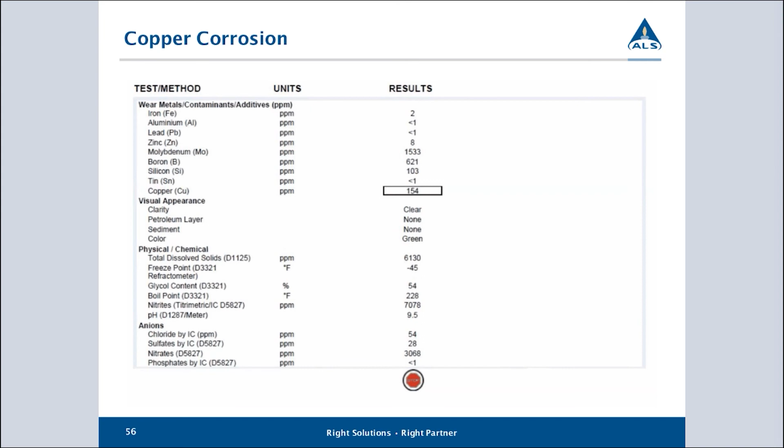Here we've got an interesting one. What we're looking at is extremely high levels of aluminium in the cooling system. The coolant has been described as hazy, so it doesn't look clear. It's got a lot of the typical additives we would see in coolant, so it looks like a normal coolant, but the pH is very high.

Something we wouldn't normally do on coolant, but because of what was suspected here, they've tested this coolant for urea and found that there is urea content present. So what has most likely happened here is this cooling system has been dosed with DEF, which is strongly alkaline, and alkaline solutions will dissolve aluminium. So what we're seeing here is somebody has accidentally put DEF into a cooling system, and this has triggered a very strong corrosive attack on the aluminium components of the system.

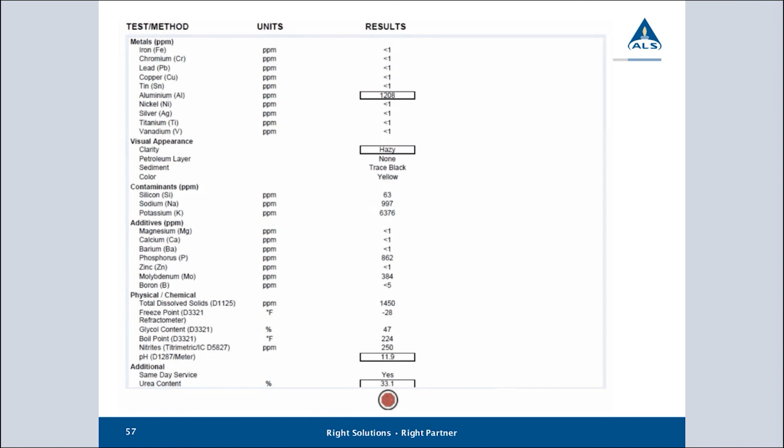Literally, when pH is much above 10.5, once it reaches 11 and greater, your coolant is literally dissolving the aluminium, and this will happen extremely rapidly. This is an urgent situation. This coolant needs to be drained as soon as possible from the system. The system will need to be flushed and checked to see how much damage has actually occurred, and then the correct coolant put back into service.

Here's another sample of a very poor looking coolant. We've got extremely high iron level, extremely high copper level, so a lot of corrosion going on in the system. We can see visible rust in the sample, and when we look at our additive levels, they are very, very low.

So what we're looking at here is what looks like almost straight water in the system. Whatever coolant was originally in the system is long gone, has probably been constantly topped up with water until it's completely replaced the original coolant, and this has allowed a lot of corrosion to start taking place. So again, the reaction we need here is very much dependent on the current health of the system. Generally, a system in this condition is not going to be in good health.

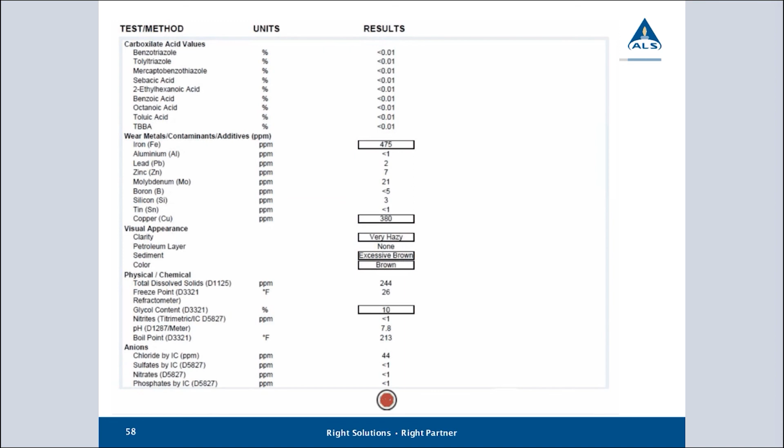We need to establish the health of the system. We would need to remove this coolant as quickly as possible and replace it with something better suited to working in a cooling system. But normally when I see results like this, you're probably looking at a system that's due for a rebuild because it has been pushed too far.

Okay, everybody, that concludes my presentation for this webinar, and now I'm open to address any questions that have come up.